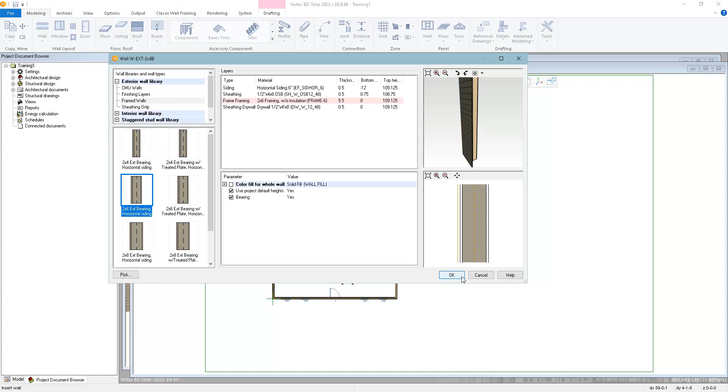Now let's look at how to edit the wall heights and wall shapes. First, I'm going to draw another test wall off to the side here. So I'll right click, select Insert Wall. We'll pick our 2x6 exterior bearing wall again. I'll just pick a random start point, lock in horizontal, and type in a distance. Let's go with 144. And then confirm.

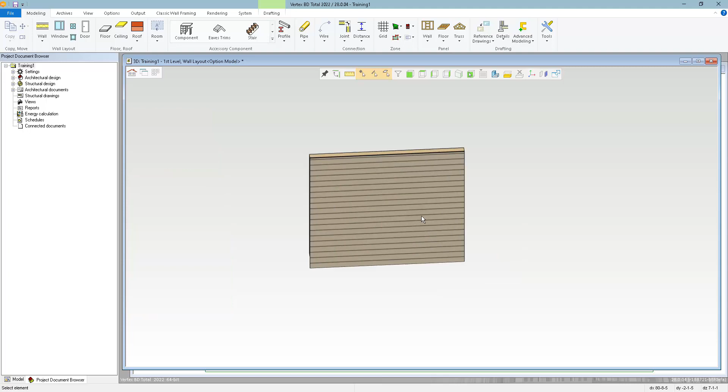Escape to get out of the Insert Wall function, and then F2 to switch to the 3D model. Now I can select the wall, right click, and select Properties, or I can just double click on the wall to access the Properties page. And now we can see the default wall height that we had set in the 3D Levels interface.

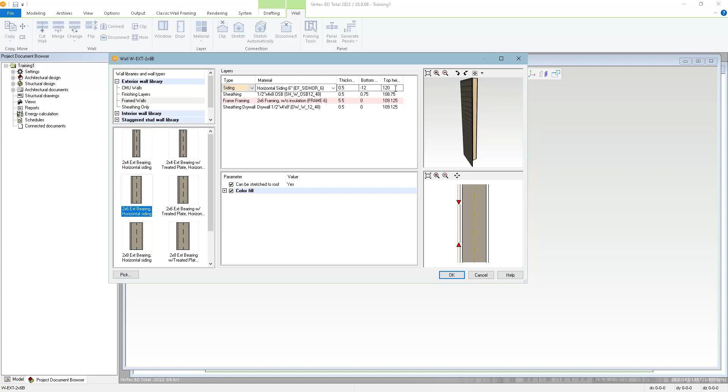You can change the height of an individual layer by just changing the value here. So for example, if I want to change the siding height to 120 inches, I click OK, and then see that just that one layer was modified. I'll double click on the wall again. Let's reset that back to 109 and an eighth.

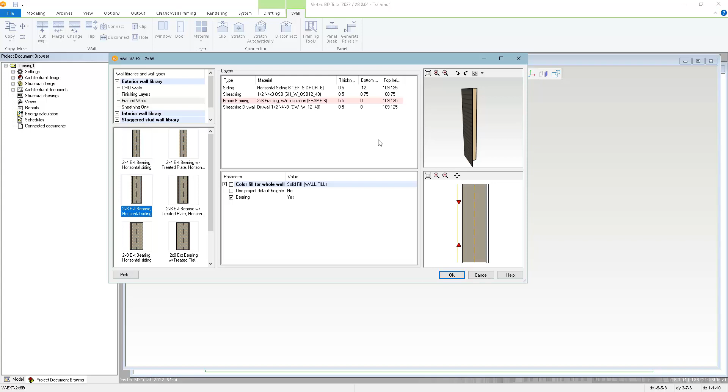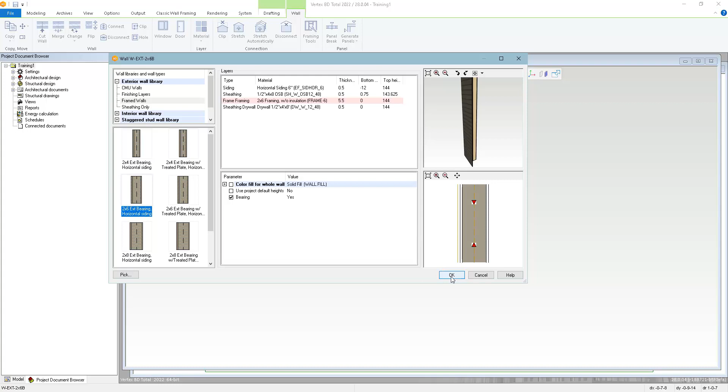And now if I want to change the height of the entire wall, I'll change the value for the framing layer. So when I enter the new value, I'll click on another layer. All the layers will update. Notice it maintains the offset for the exterior sheathing, so it's still keeping that pulled down the 3/8 of an inch. And when I click OK, we'll see the new height.

We can also change the shape of the wall in the 3D model. To do that, I'm going to left click on the wall, and now I can left click on a corner point to move it. So now I have the corner point attached to my cursor, and it's waiting for me to select the new point. I'm going to constrain this in the Z direction, so I can left click on that dashed line or hit O on the keyboard. And now I just type in the distance that I want to move that point. I'll type in 36 inches.

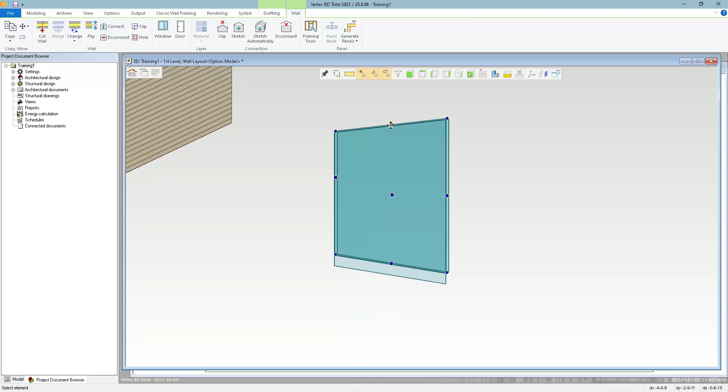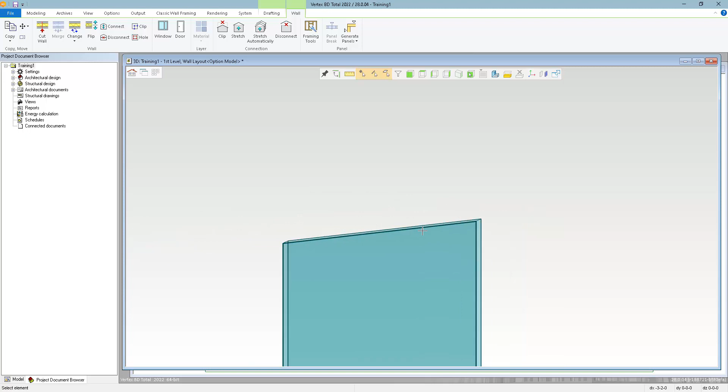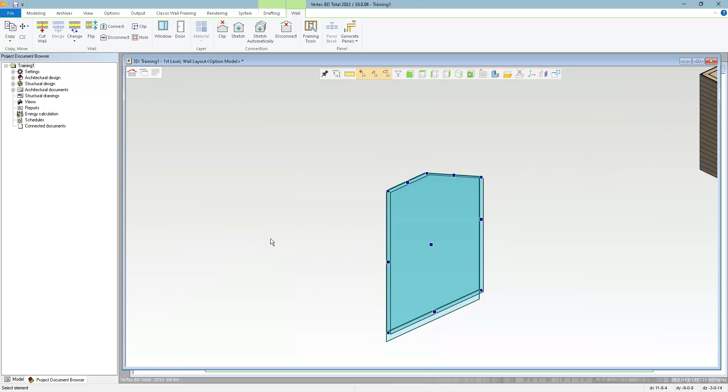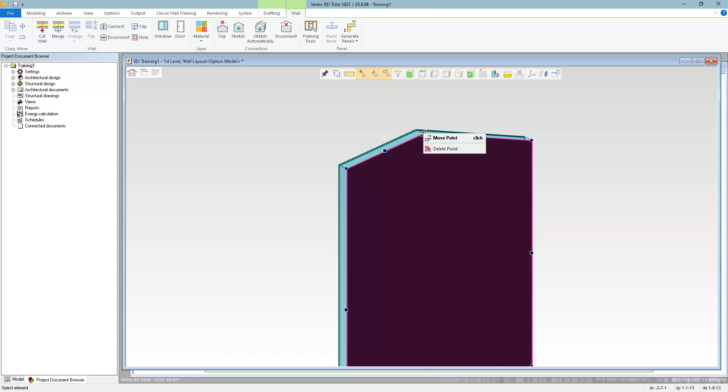We can also change the shape of an individual layer within the wall. To do that, select the wall first to turn it green, and then select the layer that you want to edit. So I'm going to change this interior drywall layer. So I'm just going to left click on that layer, and it turns purple. And now when I move these points, I'm editing just that one layer. So for example, if I want to delete this point, I can right click on that point and select Delete Point.

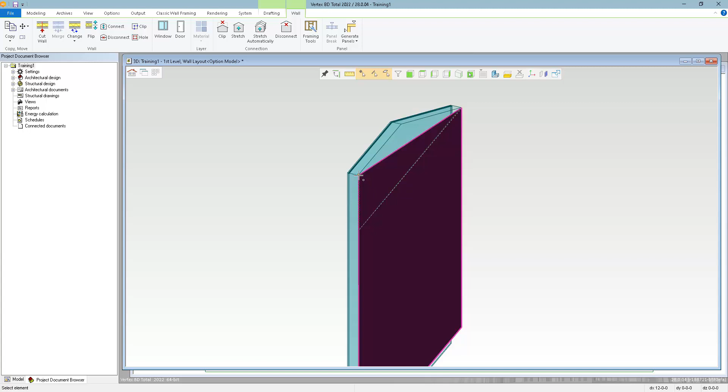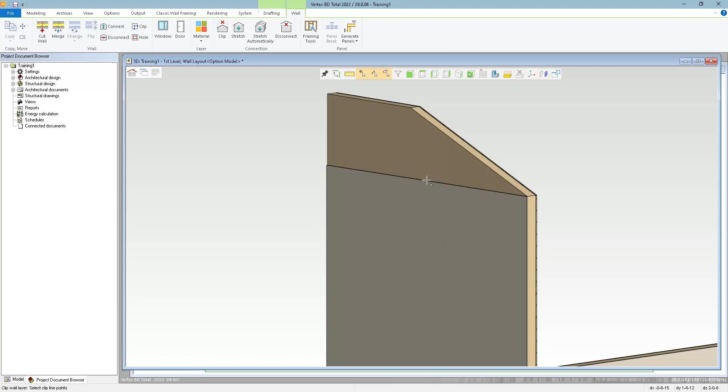We also have functions available in the pop-up menu when you have a layer selected. We can use the Clip Wall Layer function to split a layer and then change part of it to a different material. I'm just going to select 2 points to split this layer along a vertical line. So I'm constraining in the Z direction, select the endpoint, and confirm. Now I have 2 different layers here, and then I can go to the properties and change that to a different material.

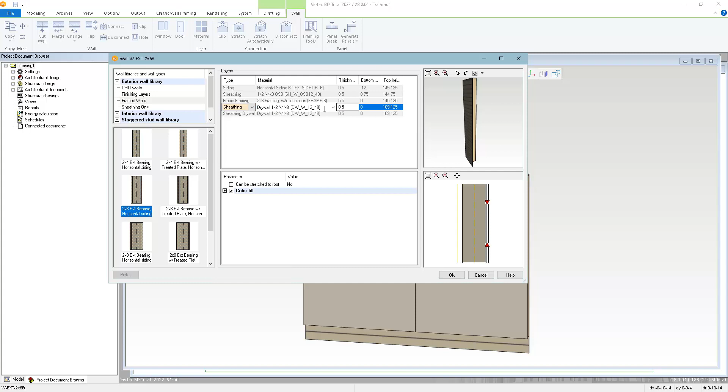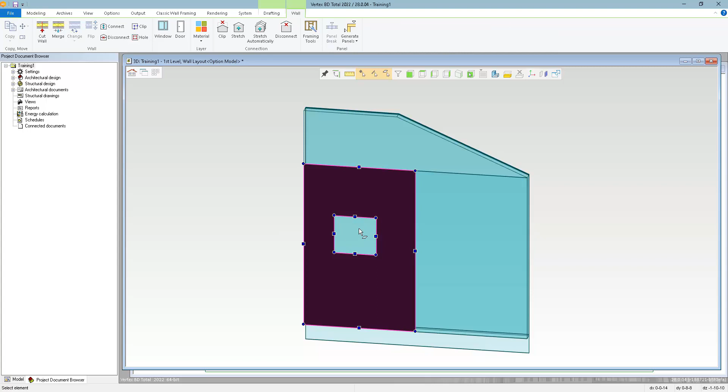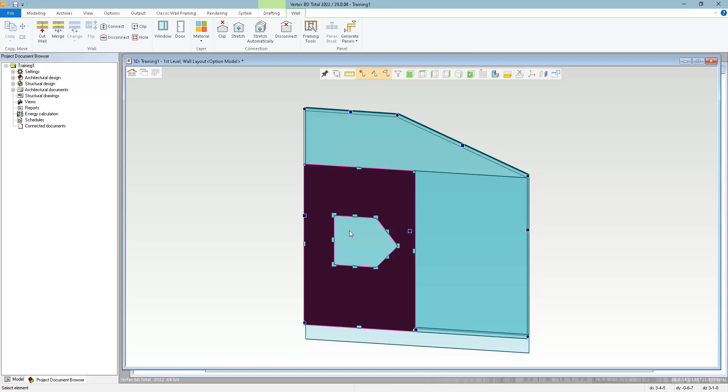We also have the ability to cut a hole in just one layer. Here I'll just click two opposite corners of a rectangle to define a rectangular hole. Now when I select that layer, I get additional grips and grab points around the hole, so I can adjust the size of the hole. We can also add new points and delete points. We can also restore the shaping by selecting Delete Shaping.